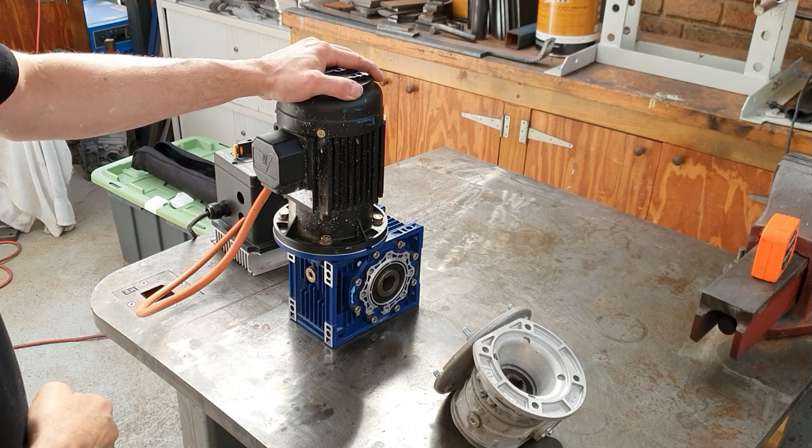So I had this three-phase motor here. This is brand new. It's a Teco brand. I've had it for a few years, just been knocking around under the bench and gathering dust. So I thought this would be the perfect motor to start with. It's a three-phase motor, and three-phase offers a lot more capability over a single-phase motor. You get a lot more torque. It's easier to control a three-phase motor, to set it up to do reverse, start, stop, and all that sort of stuff. Lots more controllability.

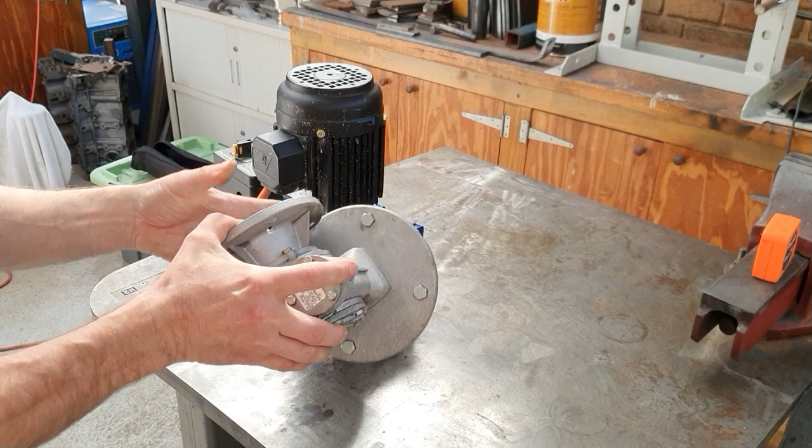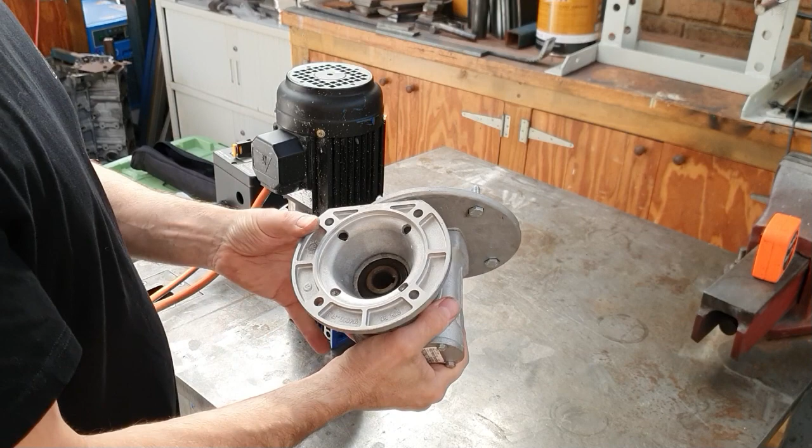So I've kept that, but it originally had this gearbox on it. Not sure if you can see the spec of it, but it's the ratio there. I'm not sure if you can read that. It's a 10-to-1 ratio. So I thought that was not going to be able to run the bead roller as slow as I want. Obviously, with the bead roller, you don't want to be running it too fast. I'm no expert, but I figured the slower the better. So I jumped online and did some research, and I've just bought this.

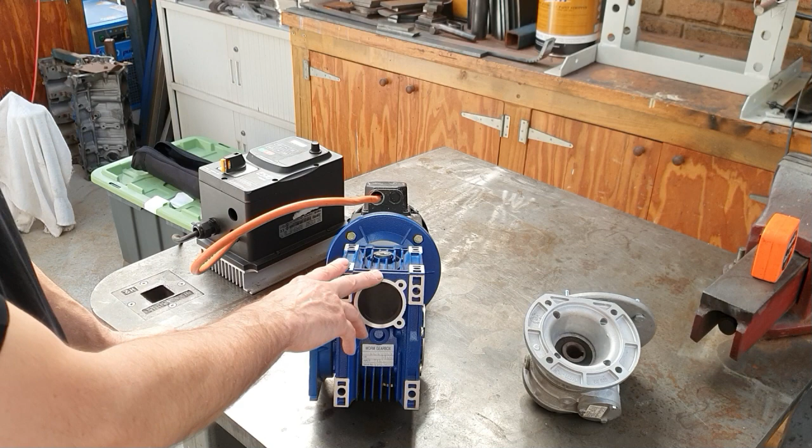This is the Chinese version of the gearbox here. They're a standard frame, so if this gearbox ever gives way, also I didn't pay much money for it. It was cheap, a couple $100. But this one's 80-to-1. The same frame you can get in 100-to-1, so it's a little bit of suck it and see, I guess. I'll see how the machine runs, and if it's still running too fast, or if it's not got enough torque, I can always upgrade that to the 100-to-1 ratio gearbox. Not expensive.

Okay, so as I said, it's a three-phase motor, but you can control that with a variable frequency drive, which is what I have here. This one is just second hand. I bought it off of, I think, Facebook Marketplace. I didn't pay much for it. It's a good brand one. You can buy these brand new from China, but I don't know how reliable they are, and I'd rather get a decent one. So this is, again, a Teco brand one, so it's a known brand. Should be nice and reliable.

Now this is a single phase one. You can get these in a three-phase to three-phase, but single phase 240 volt for me is what I wanted to do. And with these controllers you can set all sorts of variables. You can change the speed that the motor is running at. You can change the up ramp, down ramp. You can change all sorts of stuff. So I set this one, just run it now.

So that's full speed at the moment. That's way too fast for a bead roller, but we've got the variable speed control here. So I can get that to come right down, right down. I mean, that's barely moving, so hopefully that's lots of control for a bead roller. Obviously, these buttons here I'm not going to be able to use while the machine's running, so you can run these remotely. So I'll hopefully have a variable speed foot switch, which I'll use to power this.

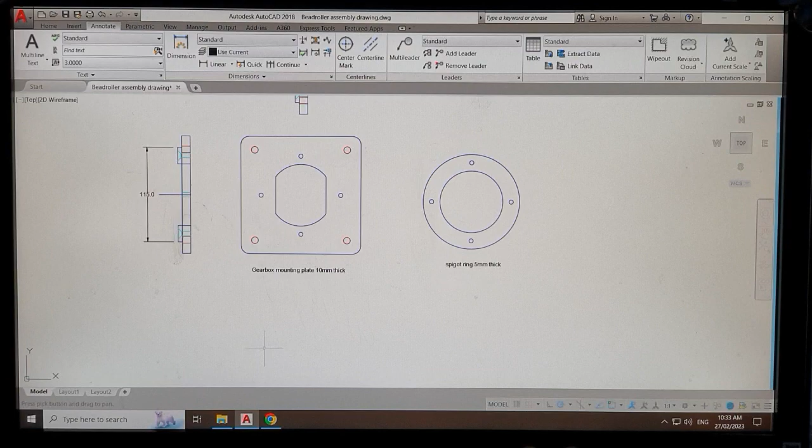Okay, so here we are on my computer. Hopefully you can see what I've got here. I'll zoom in a little bit. All right. So basically, I started off by drawing up a flange to mate up with that gearbox. So this is the flange I've designed here. These red circles are the mounting points to get the gearbox bolted up, and these 4 small ones here are for the spigot ring. So the gearbox itself has a mounting spigot on it, so my plan was to get this ring bolted up here, and that will locate that properly.

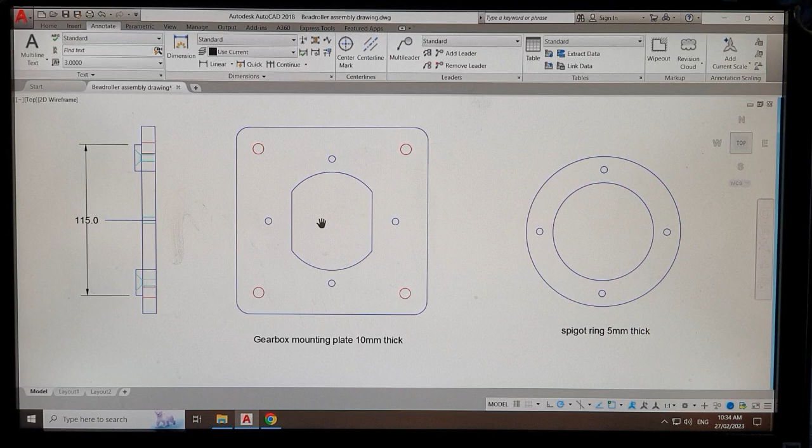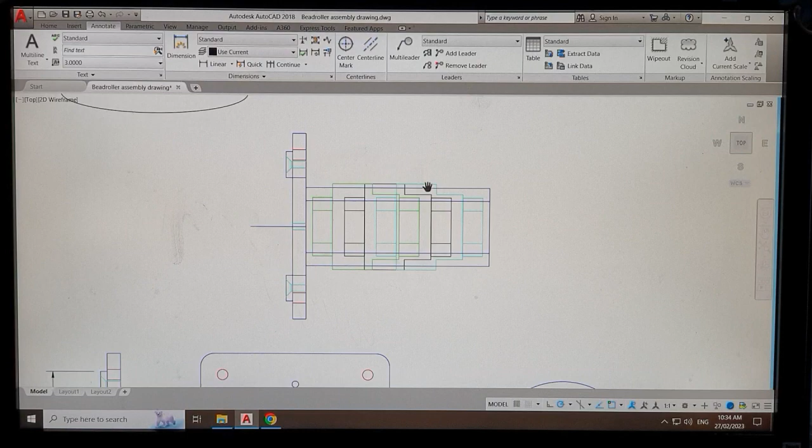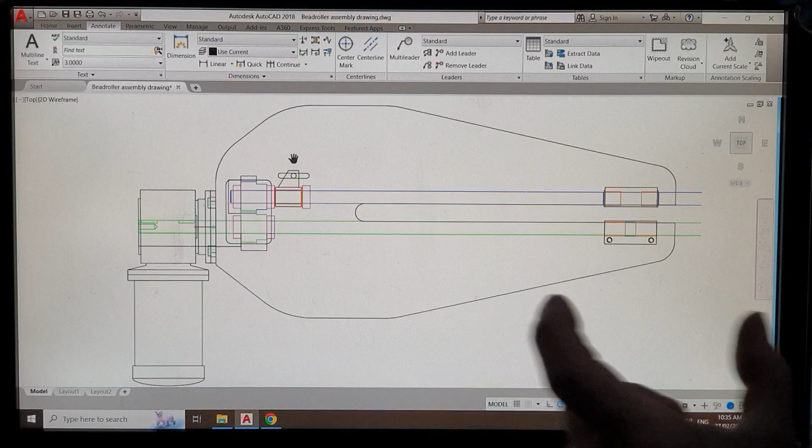So from there, excuse me, I then went to an assembly drawing. So I'm just zooming in a little bit. So we've got the motor here. Here's the gearbox. Here's the mounting flange. So from there, I then went through and designed the main frame size. I'm just going to go through this very quickly. So the slot here, which you can see, is going to be for adjusting the top shaft, so I can slide backwards and forwards. That outer window there is going to be for assembly, so that'll be to access the gears. Tighten up the grub screws, putting it all together, all that sort of thing.

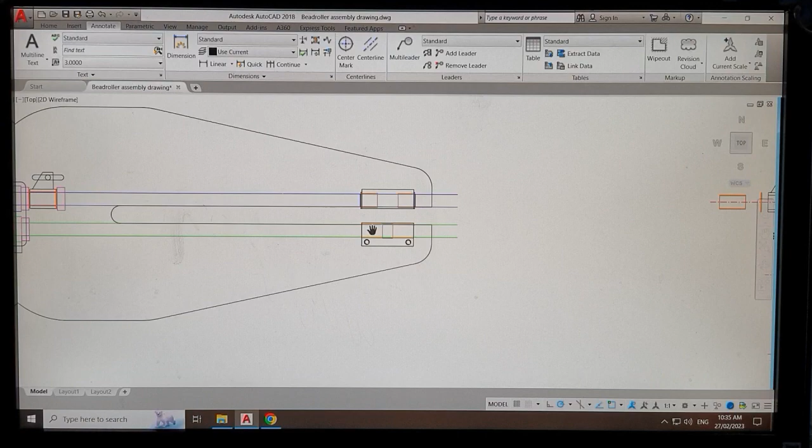And then as we come forward, you can see the 2 bushings for the front. So the bottom one I'm going to have bolt on, so it can still be removed for maintenance if I need to change the bearings. And the top one here, this also has to pivot up and down. So there's a little bit of engineering going into it. Obviously, as the top shaft moves up and down, these gears are going to get marginally closer together and further apart, so you've got to make some allowance for that.

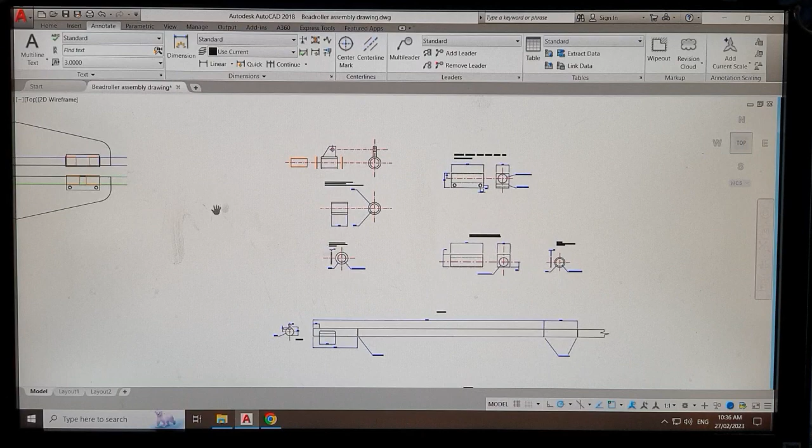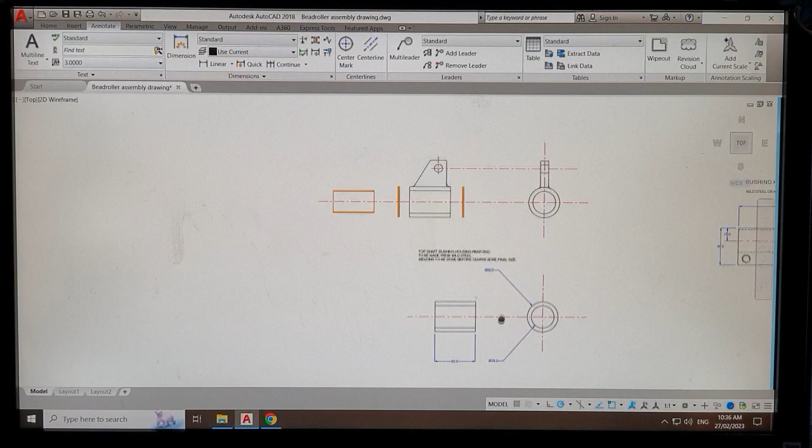And so once I've done that assembly drawing, I then went into individual components. So here we've got, this is the top bearing for the top shaft at the back. So I've got some phosphor bronze bushings which I'm waiting to get made up. That's all fairly self-explanatory. That's the main bushing there. This is obviously a welded component, so this is the bottom piece. Yeah, what else we got? This is the front bushing, so you can see the 2 threaded joints. The diameter there is just a through diameter, 28, to suit a phosphor bronze bushing.

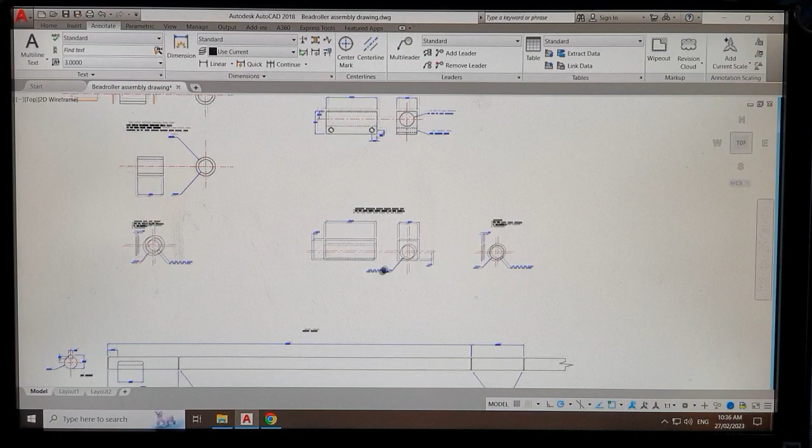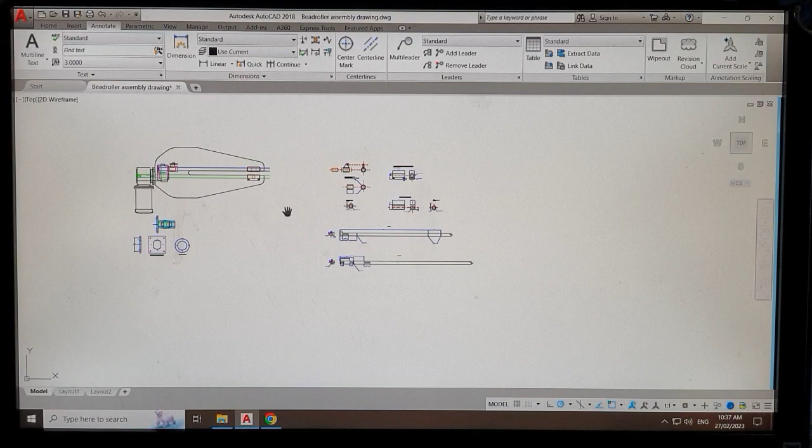It's basically simple stuff, and then I went through and designed the shafts. So they're going to be keyed at the back to suit the motor, and then I've got circlips to hold that in position. And then at the front of the shaft again, 2 more circlips here. This is where the bearing housing is going to sit. Circlips are going to hold that, stop that from moving around. That's basically it. So that's kind of where I started off. I had all these components here machined up at a machine shop. I don't have a lathe or a mill at the moment. Would love to have some, but currently I don't.

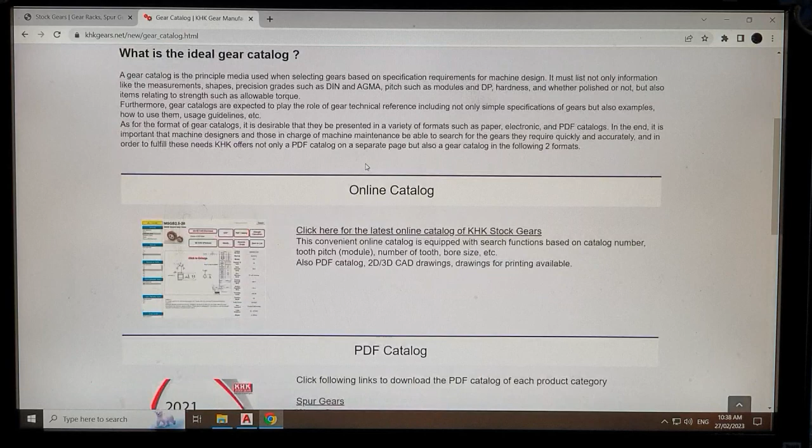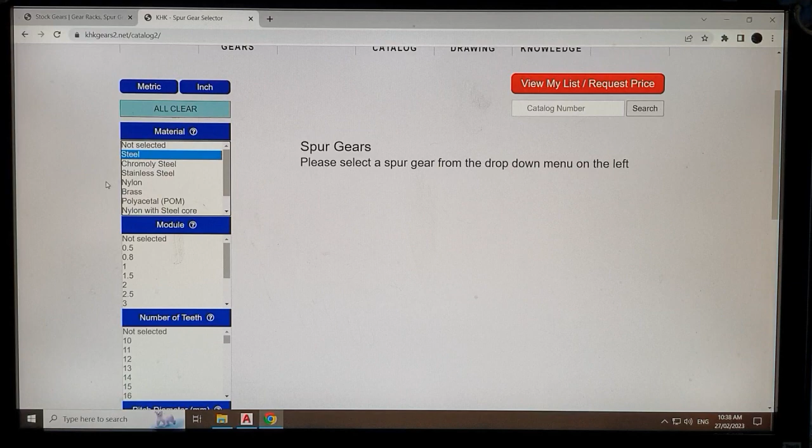And I've got either a PDF catalogue which you can download. You can order a hard copy apparently. But I just went on the online catalogue. And then you go through to spur gears again. So on the left here, you've got all your selections, so you can choose the material that you would like it to be made out of. So we're going to pick steel. Not too concerned with the other stuff here at the moment.

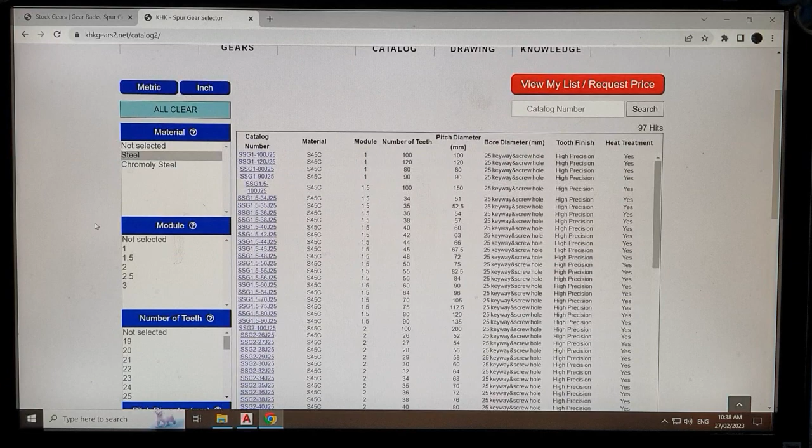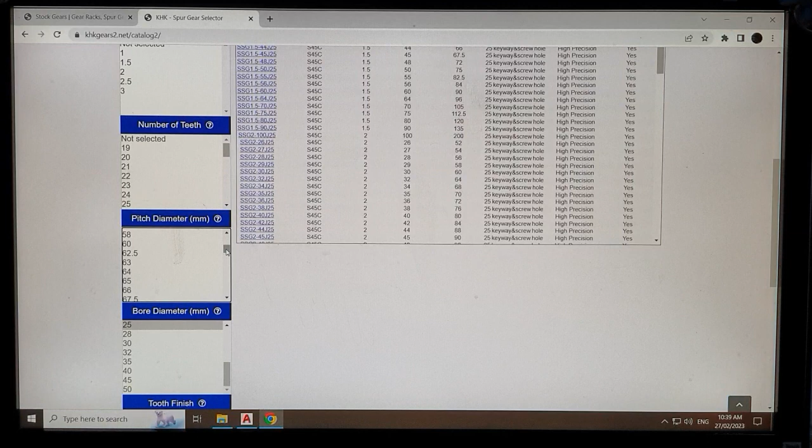So our bore diameter, so our shaft diameter, I'm going to go with a 25mm shaft, which is there. I want high precision teeth with a keyway, and this comes up with your selection so far. And the other one we need to go is our pitch diameter. So the pitch diameter, when you're building a bead roller, it needs to be relative to the size of the bead roller wheels you're going to be using on the end of the machine. So you want the two shafts to be as parallel as possible, so the gears are meshed nicely. So we're going to choose 66, which is what I personally chose,

and then scrolling up, we've got two options here. So they're different gears, so you can go through and select which one you want to have a look at, and it comes up with a drawing. So this was the particular gear I went for, and the reason I went for this gear was this 30mm dimension. So the bigger that dimension is, this will allow the two gears to mesh with each other, and obviously because the top gear needs to slide in and out of the machine, the bigger that dimension, the more adjustability you're going to get in the machine. Now, I'll explain that a little bit more when we get outside.

So that's basically how I went about it. These gears, they weren't available in Australia. I had to get them made in Japan, or ordered from Japan, and they got them shipped over. Really good service from Armstrong Gears. Highly recommend them. Brilliant. Right, we'll head back outside, and I'll show you the gears, and we'll go from there.

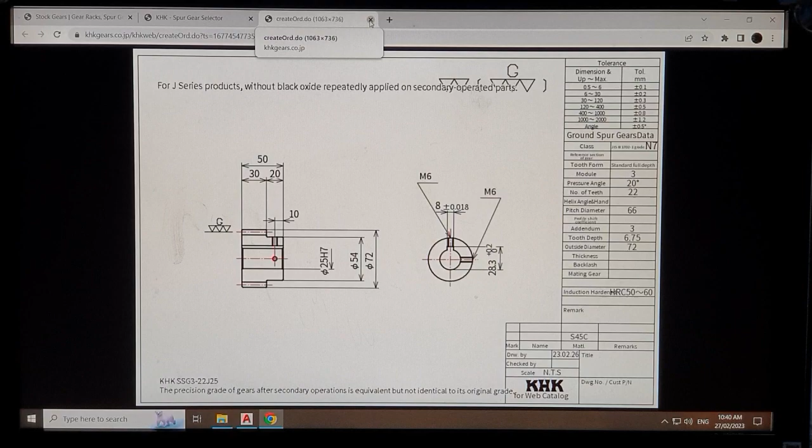So basically, after I'd done all the drawings, I had a local machine shop machine all the bits and pieces up. So they made me the shafts, they put the keyways in, and they made me up the blocks. So basically, as I was saying, when you get the machine together, these gears obviously have to mesh, and you want these two shafts to be as parallel to each other as possible. Obviously, if you've got your two wheels, whichever you're going to run, you don't want them to be like this. You want it nice and parallel.

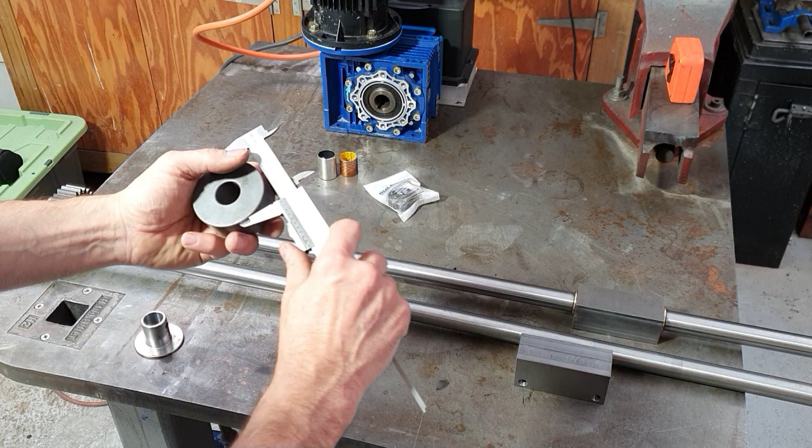So basically, when you're choosing what gears to run, you need to choose the diameter as close to probably the bigger wheels that you're going to be running on your machine. So that's kind of where I've got. These are what's that? 63.5, 64, which is 2.5 inch in diameter. So you go onto the website, and you choose the gears which have got that same pitch. So that's basically where that happened.

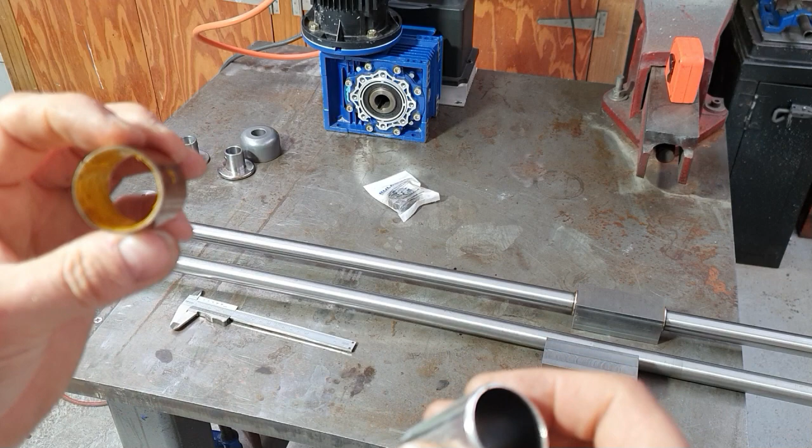So the bearing blocks I've chosen to just make out of normal mild steel. You can see, just zoom in there. You can see there's the bushings I've chosen. So those bushings, that's a normal off-the-shelf component. If you go to a normal bearing shop, you can buy these in all different lengths. They're quite thin in the wall, so it makes it good for machining components. There's different bearing linings. This one's a graphite material in there. I'm not sure exactly what that one is. Someone else may know better than me.

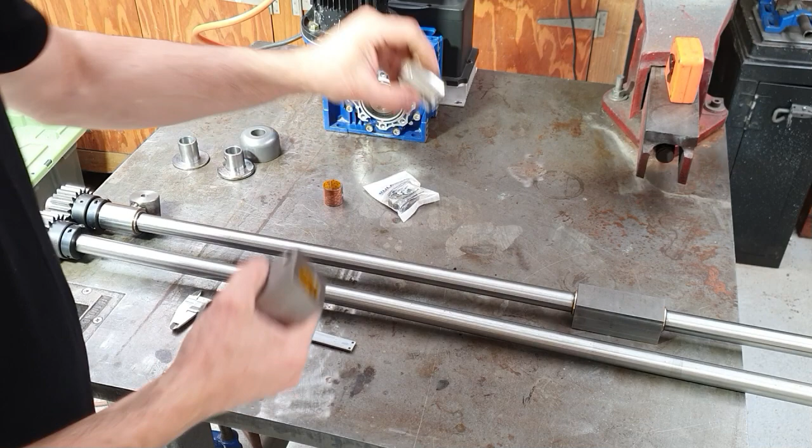But these are really good. They last a long time. They're really good for high loadings. Perfect choice for a bead roller. So they just push in. You do need probably a press to push them in without damaging them. They are split, so they'll close up as they go in. So that goes on the shaft, and you know they spin nicely, and there's no play. They're good, perfect choice. So that's my bottom shaft and the top shaft.

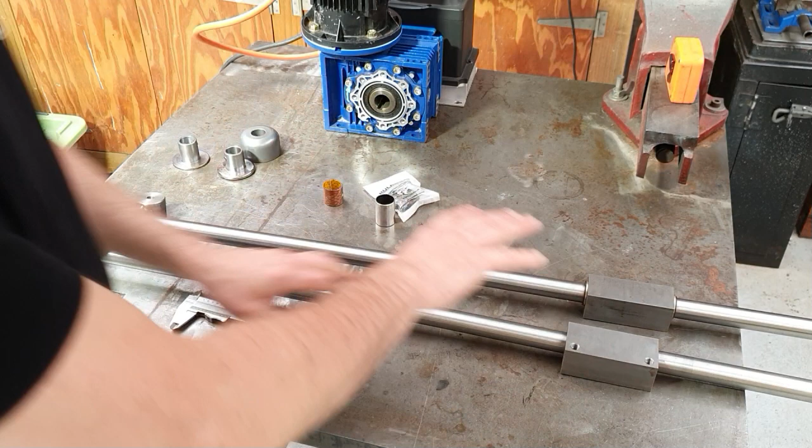Similar setup, but I've got some phosphor bronze washers there, and that's held in place with some circlips. Now at the moment the shafts, I've left them long. I'm not sure how I'm going to set up the ends just yet. Done a bit of research on the internet and looked at other people's designs, and I'm not totally decided 100% what I'm going to do there yet.

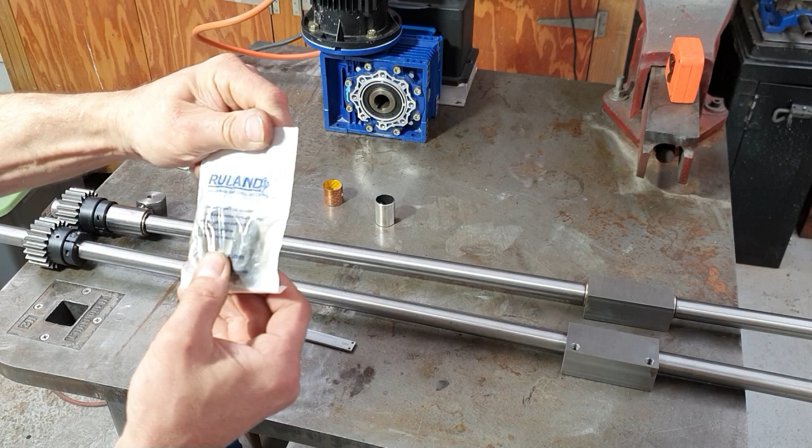I guess the other thing with the gears is they're keyed, and they also have a grub screw, but I don't like relying on grub screws. They can tend to move around a little bit, so I've put on some shaft collars. So these shaft collars come from a company here called Ruland. I'm not sure how you pronounce that. Off the shelf part, nice and cheap.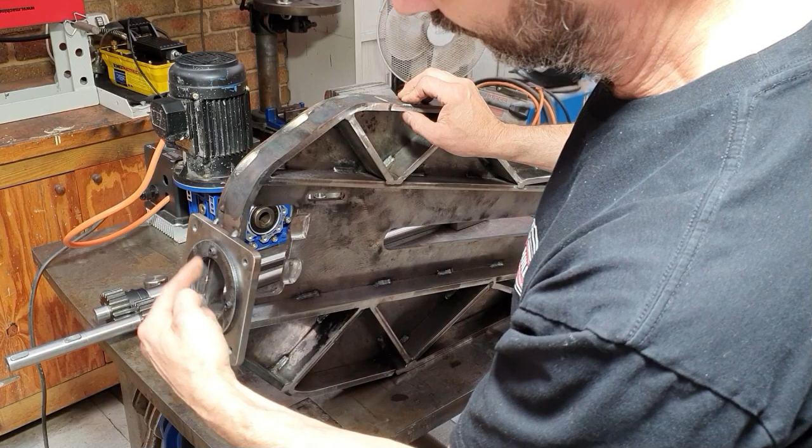So the reason I chose to show the video now is because at the moment it's open, so I don't have the side plate in place and welded off. Once that's on, you won't be able to see internally, so I thought this would be a good opportunity just to show you how it's kind of going so far. So pretty much everything here is 10mm thick plate. That's 3/8 for you in the States. I had the rear plates here laser cut. The spigot ring has been laser cut, and as you remember from the drawing, that's just bolted in place.

It's big, it's heavy, it's over engineered, but that's kind of got my name all over it. I just think if you're going to under engineer something, the second that it goes wrong, you've got to basically start again. So I over engineer everything. I like to have lots of weight and mass in something like this, because if you're using a bead roller, you don't want the machine to be moving around and vibrating on you, all that sort of rubbish. So I've just over engineered the hell out of it. Just lay it down. It's got a bit of weight to it. There we go.

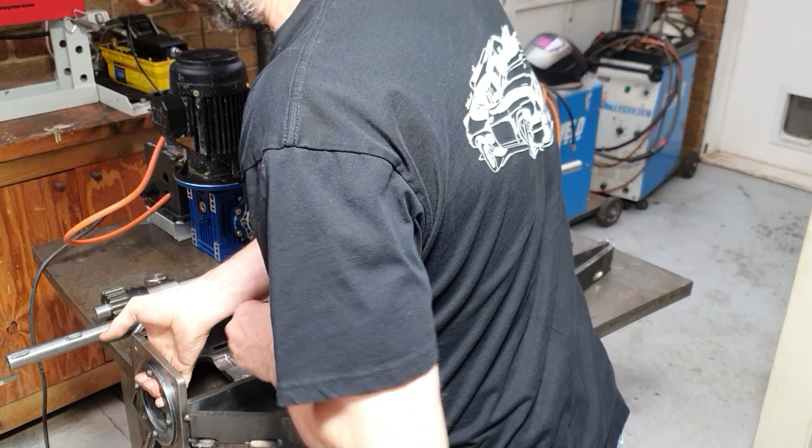Okay, so I just laid it down here now. So you can see I've put in all this reinforcing. I'm not sure if it's going to need it. I think the 10mm plate and the other 10mm plate on top is probably going to be plenty of rigidity, but again, it adds weight to it, adds mass to it. And once the outer sheet is on top and welded off, obviously I can't then add this afterwards, so it's either a now or not at all kind of thing. And I just thought, for the cost of whacking some extra steel in there, I think it's worth the potential gain. So I've just welded it off and made triangles, nice strong shape.

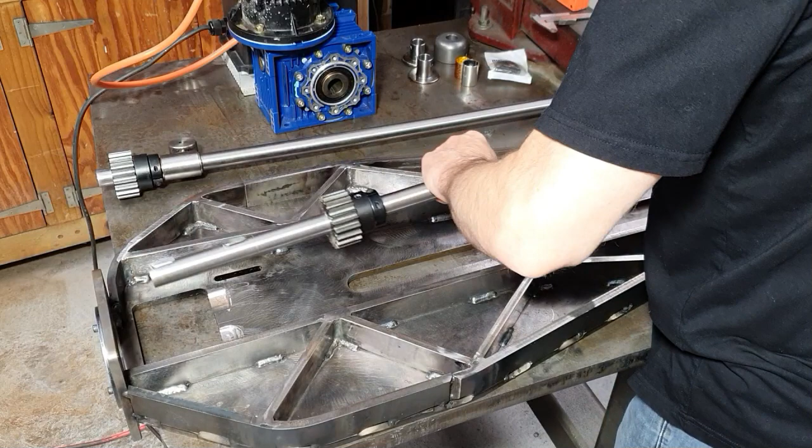So we'll assemble this together, and hopefully you can sort of see how it's coming together. Hopefully, maybe. So basically, the bottom shaft, bear with, not done this for a while. It's going to sit in there. Not sure if you can see on camera. I've got the two mounting holes here. I've got bolt holes down here. These are threaded, so that'll be bolted in from there. So I'll do that now, and I'll just speed the camera up.

The other thing you might notice here, I've got some cutouts here. The gears were thicker than what I had envisaged in my design, so I've had to put a bit of relief in there. I think I used a finger sander, to be honest. Alright, so that goes there. I'm just going to put some bolts in there, and I'll be back. Hang on.

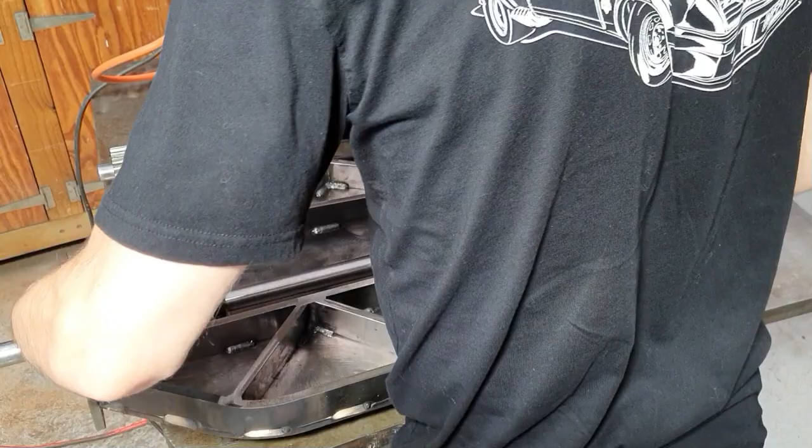So that's how the motor gearbox is going to mount, and the bottom shaft's in. I've got a little bit of scalloped out metal there, not sure if you can see that, that's so that collar can sit there. The window here is obviously accessibility for lubrication and to assemble the machine, take it apart, all that sort of stuff.

So as I said before, I don't trust the grub screws on these gears. They can move around with a bit of vibration, and in time the grub screws wear out. So these collars, they're a great addition. So I've got one in front here, and I'll probably put one in behind. I'll just show you how they work. So again, these are made by Ruland, or Roland, I don't know how to pronounce that.

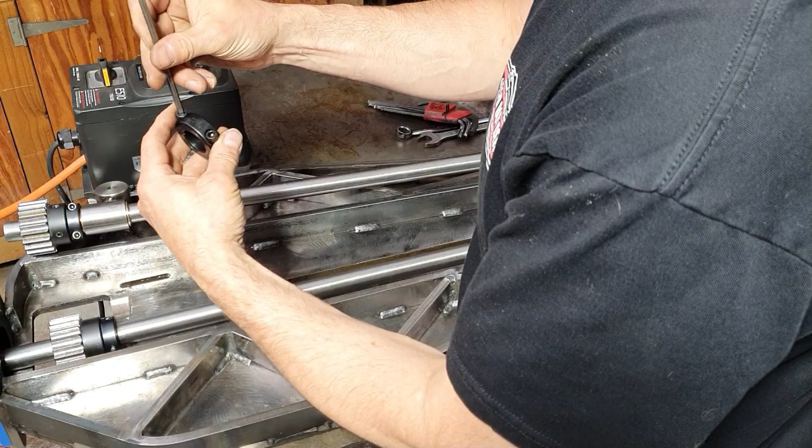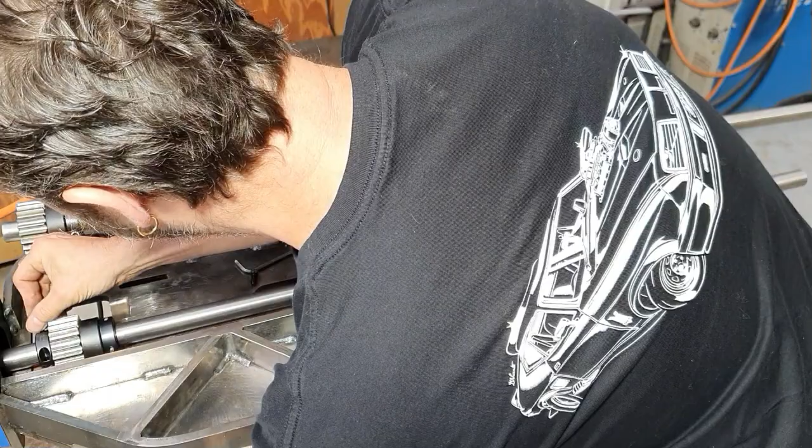So I screw this one out, and it's a split collar. That obviously goes in on one side, it goes on top. Let's see if I can drop this on the floor. There we go.

That's basically it. They're a brilliant thing, and that'll lock that gear. That will never move. Well, hopefully that will never move. So the top shaft, again, I've had to put a cutout here. This allows the split collar to move in a little bit more clearance. This slot is for adjusting the position of the top shaft as well.

So that's basically hopefully going to sit somewhere in there like that. That slot will allow that to move backwards and forwards. And as I said, the wider the length of the gear here means the more adjustment you're going to be able to have. So that's basically how that's going to work. So I'll just adjust this so I can get a bolt in from the back, and then we'll turn this on and I'll show you it in operation.

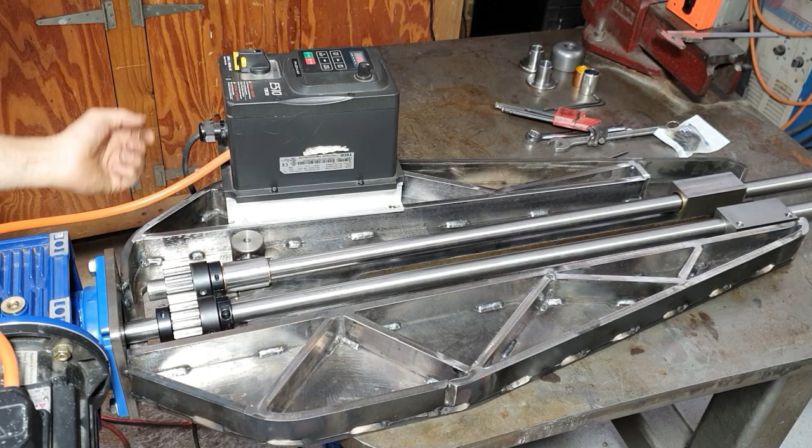Okay, so that's basically the top shaft fitted. I've put the bolt underneath. That gives us the maximum throw forward and backwards. Obviously I would like to engage that as much as possible, and if I can adjust it from the front, I'll go down that road and leave those fully engaged. So the things you've got to make sure of when you're designing one of these is that the shaft can move up and down and those gears still stay meshed. So there's a little bit of engineering making sure you don't get those gears to bind up or be too loose.

That's basically where I'm at the moment, so I'll just show you roughly what's going on here. So that's full speed. And you can still move the top shaft up and down, and it's still meshing okay. How slow can I get it to run? You're not going to want to run any slower than that. That's got lots of controllability for me. If you're doing fine turns with the bead roller, you need to have lots of control, lots of slow speed. And there's plenty of torque in that.

Obviously it'll be different with the actual rolls, but if I hold it, I can't slow that down. It's got lots of torque. I can't stop it. There's no way. So hopefully that'll be okay. I guess it's a little bit of suck it and see. As I said before, if it works out there's not enough torque, I can change that gearbox to a 100 to 1 ratio, and that will give me 20% more torque than what I've got now.

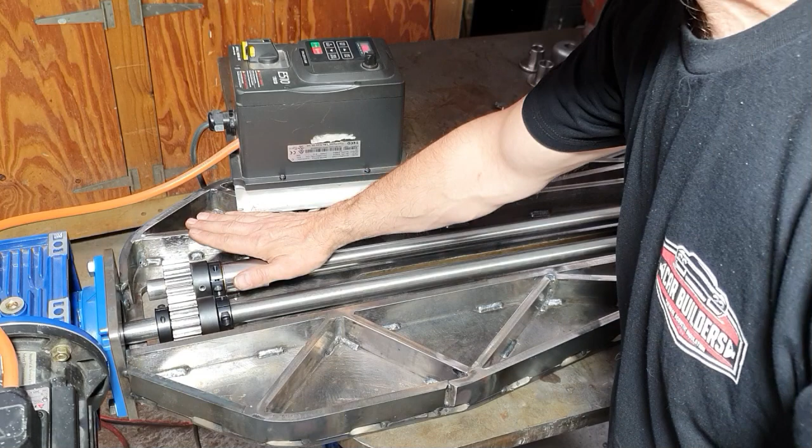So basically, the next thing I'm going to be doing is put in another whole side plate, another 10mm plate to go right over top of all this. Things I've got to be wary of is that this doesn't bind up. So when the plate sits on top, this needs to have 0.1, 0.2mm of clearance. And again, the same with the front block, that needs to have clearance so that can move up and down. And I also want a little bit of clearance for this so that I'll be able to undo the bolts and slide it out the front.

That's basically where I'm at with this design. I'm pretty happy with it. It's going to be a decent size. The wheels, I'm not 100% sure if I'm going to put those out here or in here. But that gives me 750mm, that's 30 inches roughly. That will do a full sheet. So I'm hoping it's going to be big enough.

So that's what I'm up to at this stage. I'm pretty happy with the progress. I'm interested to see how it's going to come out when we put the sheet on top. We'll see how we go. It should be a good addition to the workshop, and I've got some projects coming up that I'm going to need this machine for, so we'll be making as much progress as I can over the next weeks, month, two.